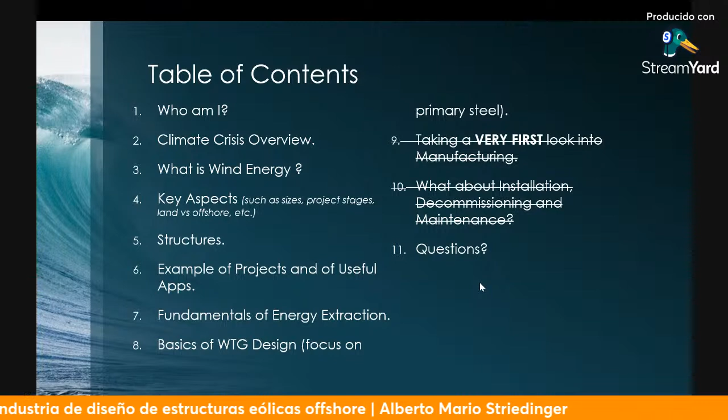And later on, the fundamentals of the energy extraction, so only the fundamentals, a bit of the basics of the wind turbine design, focus on the primary steel, and afterwards, some questions if the audience may have any questions about this topic.

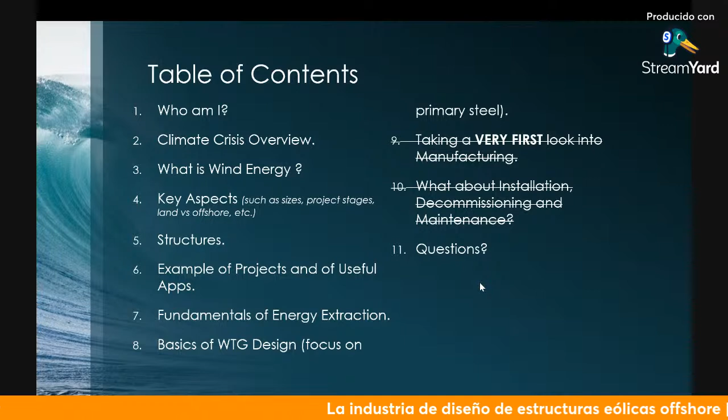And just before that, let me turn on my camera. Yes, that's better. I think you can see me now. Hello.

All right, so first a bit about me. So I'm a mechanical engineer, graduated from the Universidad del Norte in Barranquilla from 2005, 2010. Later on, I did 1 year in the United States for my bachelor as well. I ended up doing a master in renewable energy technologies, among those wind energy, which is the field I specialized in, and consecutively started working in the TU Eindhoven, that is in the Netherlands, with the University of TU Delft.

Later on, I went on working as a structural design engineer and the lead design engineer since 2014 at a company called Siemens Gamesa, until recently 2021, when I finished my work in the company. I also have my leisure time, of course, like any of you have hobbies. Mine is a bit of performing arts and looking a bit behind the cameras.

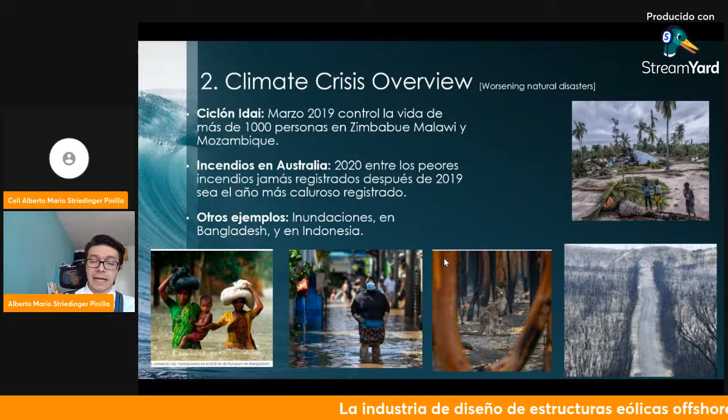So the climate crisis overview. Why is this important? Just to name a few aspects of what the world is going through. You have, for example, in 2019, there was a catastrophe happening in Zimbabwe and Mozambique. You have the extreme fire events that happened in Australia. 2019 was the record hottest year, especially in summer, obviously. And in 2020, you had the worst fires that the country could experience.

We also have floodings in Bangladesh, Indonesia, and obviously we have natural disasters also happening within our country, in Colombia. These are just a few pictures of what is happening around the world, and hopefully motivators for you to care and go into the renewable energy industry and solve the climate crisis or try to tackle it.

The news becomes harder once you realize that, according to the United Nations, the continent that's going to be most affected by this climate crisis is Latin America. So it's practically us. That's something to keep in mind, because country policies should be aligned in order to mitigate the effects this is going to have on everybody, especially in South America.

Why is this happening? Well, this is happening due to the greenhouse gas effect. If you go to the United States, they have this department called NOAA, for atmospheric and oceanic sciences. We can see that the CO2 emissions have increased rapidly. At the right hand, you have a plot from 2007 until 2019, or actually until now, which is a rapid increase.

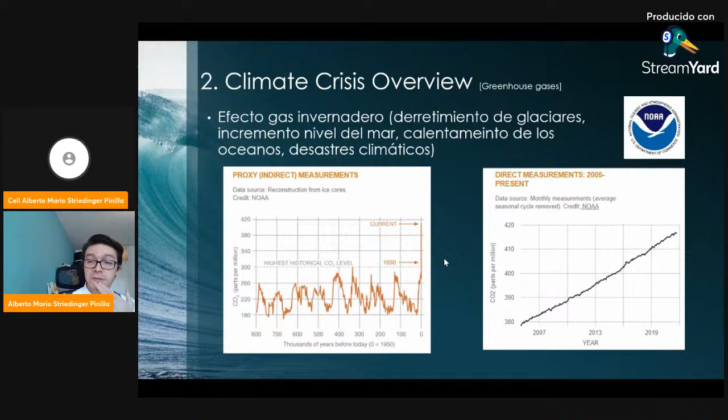But if you compare it to the left, which is what has happened around 800,000 years before, we see a cycle going up and down. It's only now, when human activity is more prominent, that we have an increase in these greenhouse gas emissions. Now, why is this important? What does it have to do with me, with us, with the climate?

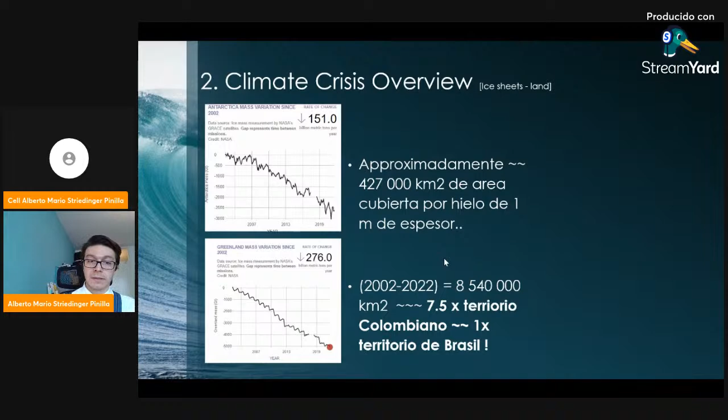Well, one example of this is the melting of the Antarctic and Greenland ice sheets, right? It's so drastic that, approximately, this is around 151 plus 276 billion metric tons per year. Just to try to glance at it, take this value from 2002 to 2022 and think of an ice sheet with a depth of 1 meter. That will cover around this much of an area,

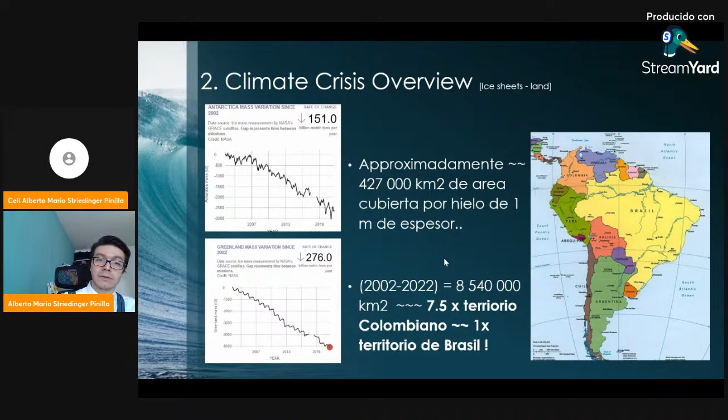427,000 square kilometers, which in this time frame between 2002 and 2022 is around 7 times the size of Colombia, or practically the size of Brazil. So this is a way to use data that you can find freely available and transform it into something practical. And this is just one aspect of the climate crisis, right?

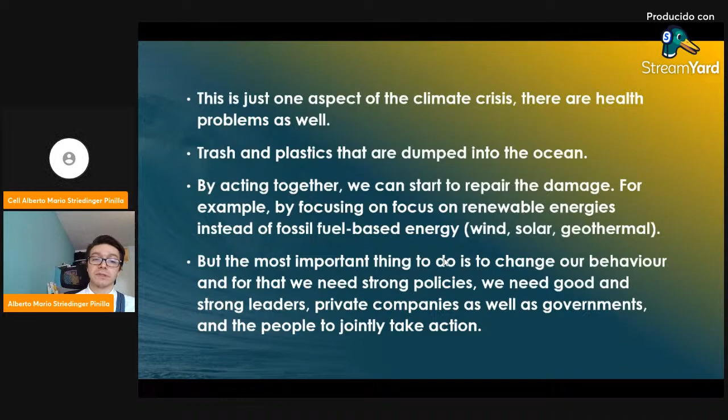There are also health problems related to it. There's trash and plastic that people and industries are dumping in the ocean. But by acting together, we can really repair this damage, for example, focusing not so much on fossil fuel-based energies, but more on renewables like wind, solar, geothermal, and so on. And something very important, besides the engineering aspects and technologies, is to actually change our behavior and come up with new strong policies. We need strong leaders, private companies, as well as governments to take action with the people.

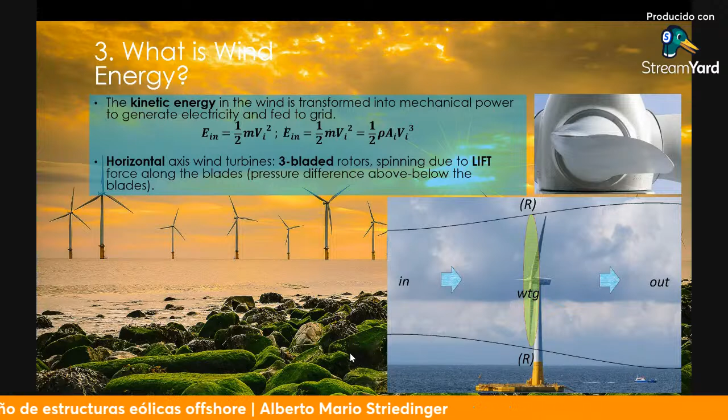So you have an inflow and an outflow, which is represented in the small diagram there in the right corner. And the rotor, you can consider it as just a flat plane where the energy is extracted. We're only going to talk about horizontal axis wind turbines with three blades, which are the most implemented. They are spinning due to the lift forces along the blades, and this is caused by the wind passing through.

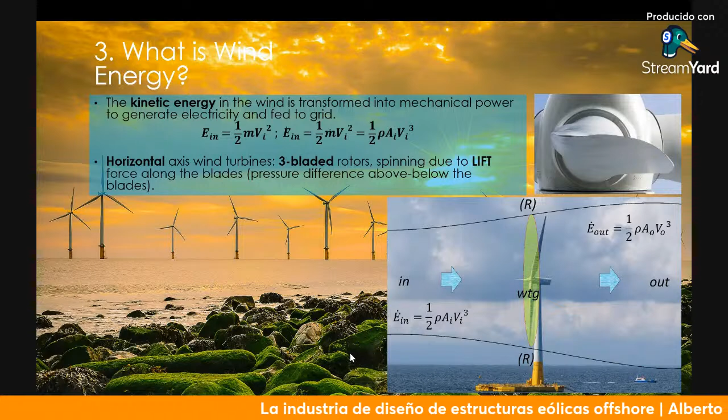The energy, as you remember from your fluid mechanics courses, the kinetic energy in a fluid is proportional to its density and to the cube of the wind speed, the velocity in this case.

But there is a maximum that you can achieve. If you take the energy balance into account, you have the energy flow going in and the energy flow going out. You take a ratio, practically the coefficient of performance, which is a way of measuring the efficiency of a turbine, the output generated, the power PR, divided by the energy incoming in the flow. With that value, you can estimate what your nominal power capacity would be.

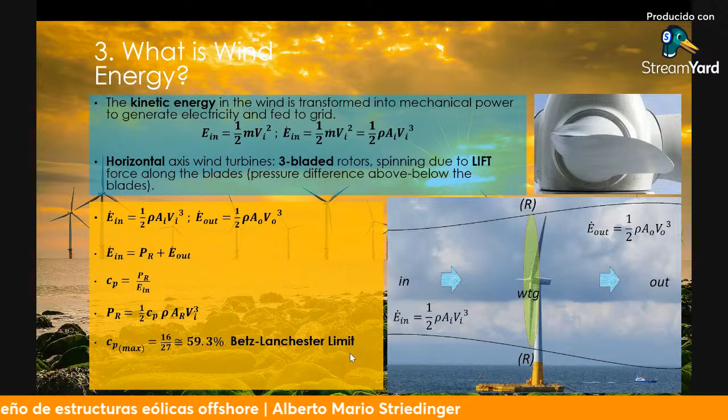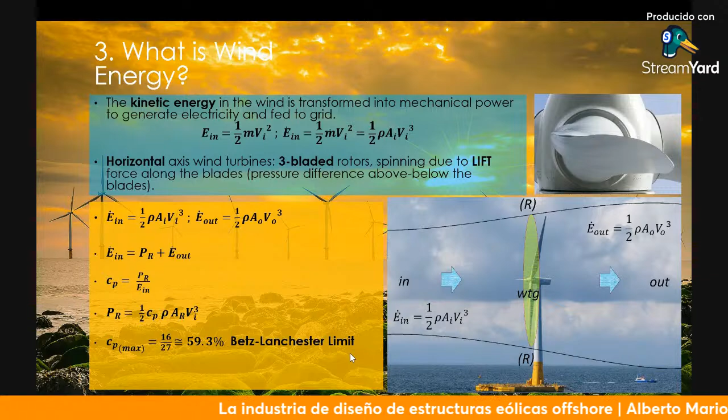There is a maximum to what you can get, and with this formulation, which is very basic, it considers a stream flow through the rotor. This work was done around 1915 to 1917. The maximum efficiency you can get, and therefore the one you're not going to achieve, is 59.3% efficiency in conversion. This does not take into account any losses, nor the rotor itself at this moment. So it's a top, a maximum.

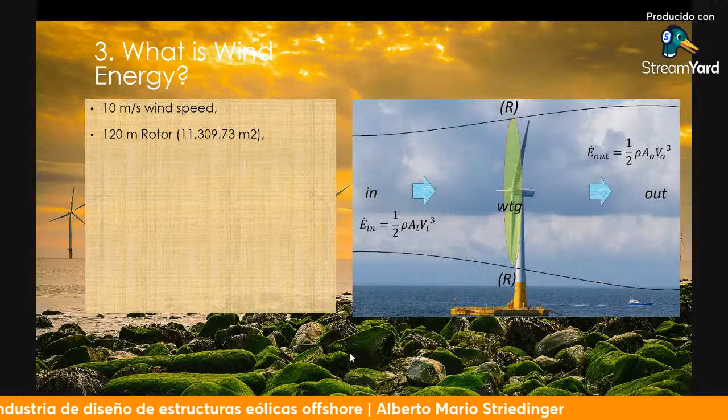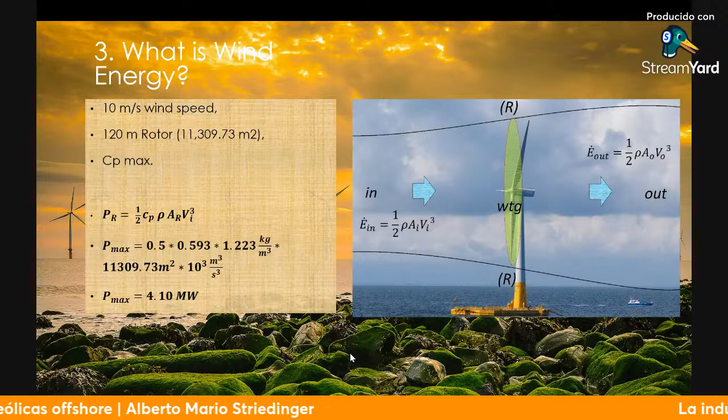To give an example of what this means: if you take the same formulation, say you have a 10 meters per second wind speed and a 120-meter rotor diameter, quite big, around a radius of 60 meters. If you have a maximum power coefficient, say 0.593 - not what a turbine will actually have, but the maximum you can get - then with these dimensions at this wind speed, the maximum is 4.10 megawatts. Any turbine about this size will never reach 4.10, but it's the maximum it aims to. That's the theoretical limit.

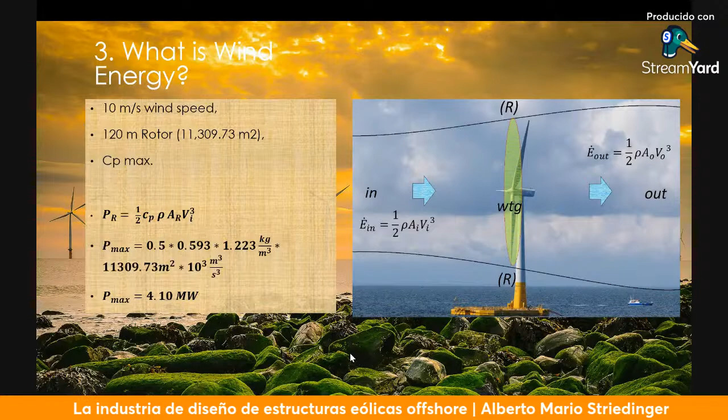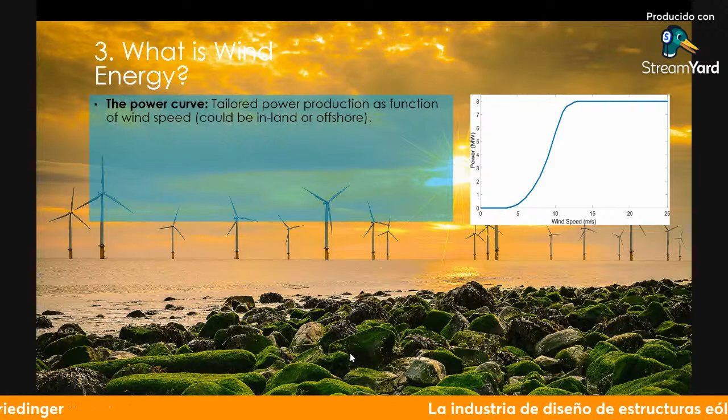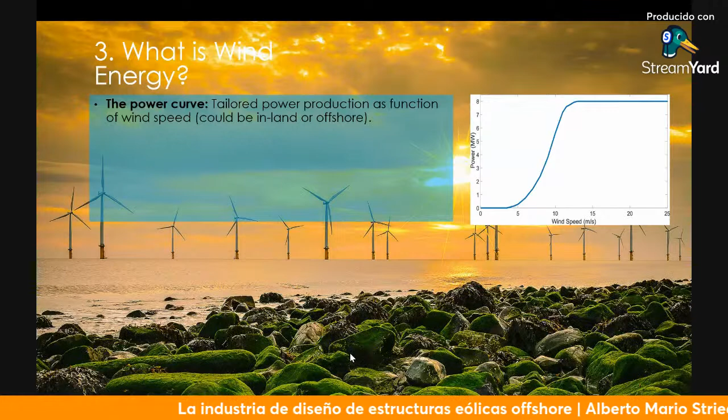Now, the power curve. In practice, the power coefficient varies with the wind speed, and therefore the power the turbine produces also varies with wind speed. These are tailored - it's very difficult nowadays to find one for a turbine because they're tailored for the site and for the client. This applies either for onshore, inland turbines, or for offshore wind turbines; both cases are applied in this manner.

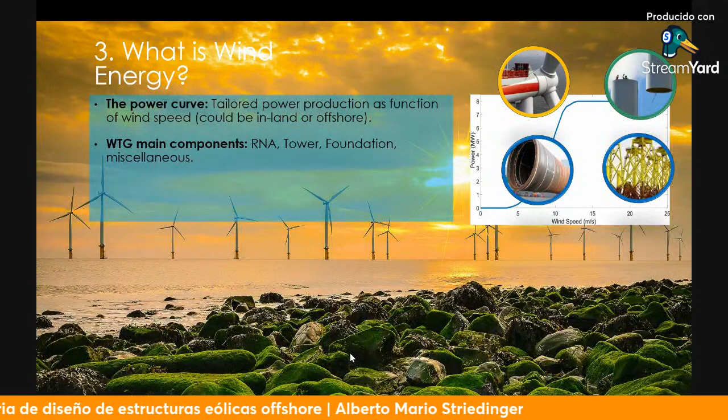Now, the main components we will discuss in this presentation are the RNA, short for rotor nacelle assembly, which is practically where you have the 3 blades and the hub, the nose in the middle. The nacelle assembly is where most of the electrical components, the gearbox, and other aspects are housed together - you can see it in the top corner in yellow. You have the foundation, and the tower to the right, which is installed offshore in a few sections - 2, 3, 4 sections. You have the foundations at the bottom, which could be a monopile, a big, very big cylinder, or you could have a jacket structure, which is a lattice structure.

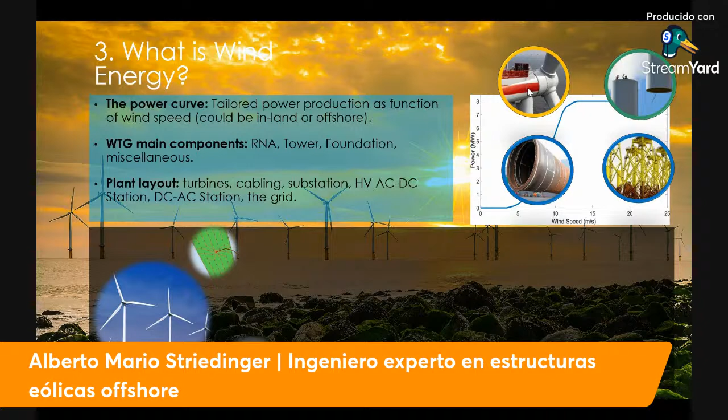The plant layout is very important to know about, because the wind farm is not only the wind turbines - to consider that would be a bit naive, not so realistic. So what do you have? You have the wind turbines in the farm, and the cabling that helps make connections within the turbines. These cables then go either to a substation or directly to a high voltage converting station, from AC to DC, because it needs to be transported to land.

In this case, I included 2 pictures of 2 projects. One is the Seamade project, one of the largest offshore wind energy projects in Belgium. The other one is unmanned, I think it's in the UK. It's also an HVAC/DC station, a converter station.

Then of course you have the connection going to land, and in the land - hopefully you can see the picture - you can see the relative size of the cable housing, because there are many cables going through it compared to the worker. Those are the cables we're discussing. Then later on you have the transforming station, where you go from DC to AC again, and it's fed back to the grid. So that's what we mean by grid energy.

So to summarize, this covers horizontal axis wind turbines in the offshore setting.

Because the performance characteristics, power curve, and power coefficient curves for market wind turbines are not readily available, you can still make use of reference wind turbines, especially for this presentation. One such reference is from the National Renewable Energy Laboratory in the United States, in short NREL. I want to show you the importance of these plots.

The cut-in wind speed is the wind speed at which the turbine starts producing electricity. It's not the wind speed at which it starts rotating, because that's lower. It's the wind speed at which it starts producing electricity. Then it ramps up, so your power coefficient starts to change, getting slightly better.

You reach a point where you are producing your nominal output, in this case 15 megawatts. That's the nominal power of this reference turbine. At that point, you could try to go up, but the machine will not handle it, so you have to cut it, capping the maximum power you are performing.

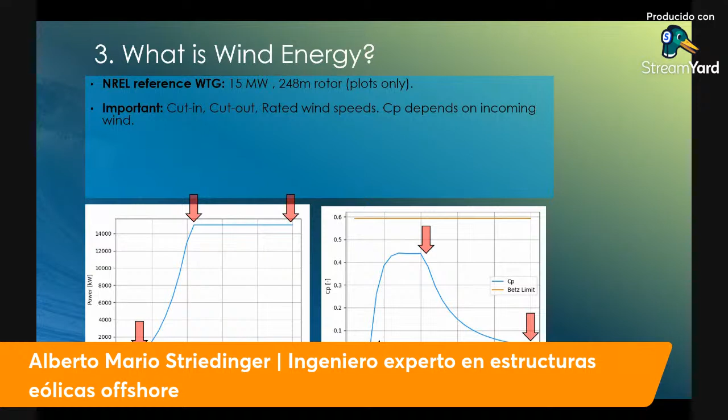To do that, the blades are pitched, rotating on their own axis, so your power coefficient starts to decrease until you get to the cutout wind speed. In this case it's around 25 meters per second. That means after that, you're not producing any power, it's cut out.

But once it starts to rotate, the relative wind speed, the wind velocity relative to the blade, starts changing. It's not horizontal anymore because it's rotating. So you need to incorporate the tangential velocity, which, if you remember from your dynamics courses, changes with respect to the radius. The rotational speed, the RPM, is not changing at a fixed RPM, but the tangential speed is.

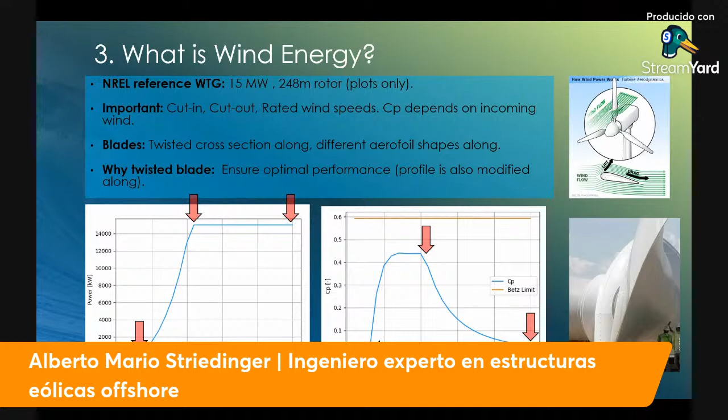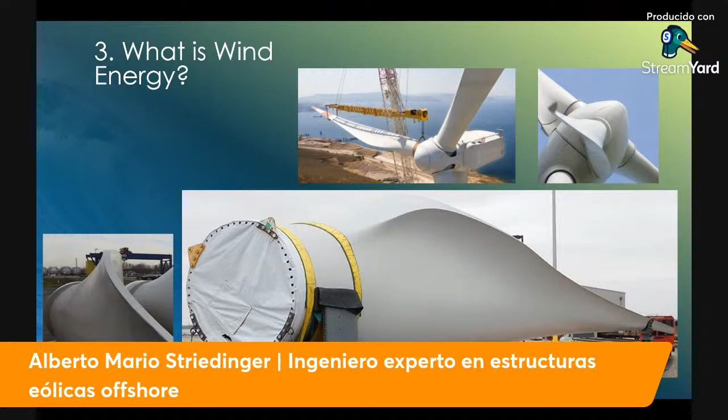Also in the transportation, you can see how this goes. So just to have a visual idea that indeed the blade cross section is being twisted and the airfoils are also changing, meaning the cross section area changes. Now I want to tell you about some key aspects.

A few things about the size of these machines - the ones the industry has been dealing with, and the ones to come, this year and next. Also the wind profile and load types, meaning the loads these machines must sustain to perform during their lifetime, roughly 20 to 25 years. The worldwide distribution of energy, so which countries and continents are the leaders. The project stages for investment, starting from zero practically until decommissioning, and a little bit about plant economics, the core basics only.

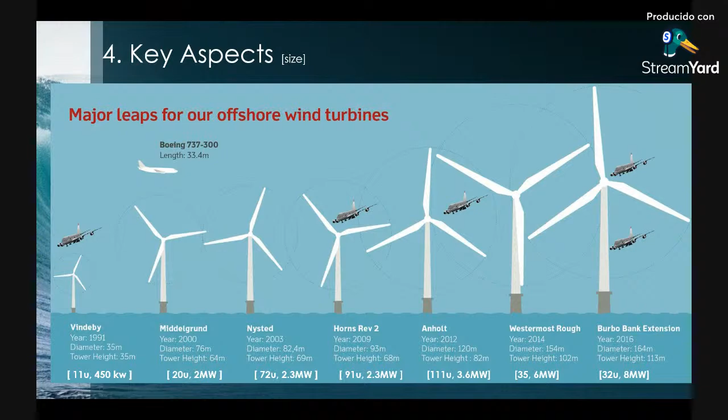As for key players, I'm not mentioning all of them, but you have Siemens Gamesa Renewable Energy, SGRE, as a turbine manufacturer. You have General Electric as well, making a turbine called the Haliade-X. You have Vestas and MHI Vestas producing this type of machine too. Normal wind turbines, as mentioned, have around 160 meter diameter, 120, 140, and so on.

But what about the mass of this structure, taking into account the tower and the rotor nacelle assembly? You can easily go from, let's say, 600-700 up to 1000 tons. Why? Because the tower alone, the steel structure below the rotor, can weigh as much as 400 to 600 tons of primary steel - just the wall thickness, the flanges, the bolts, mainly the shells, the whole structure.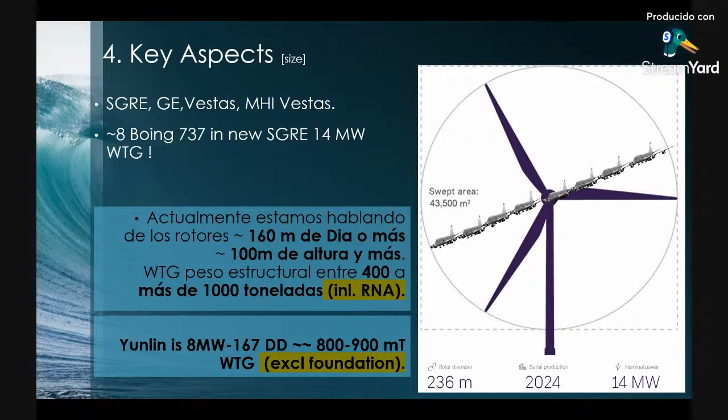Take for example this project I was fortunate to work on with Siemens, called Yunlin, in Taiwan. It has 80 turbines of 8 megawatts each, with a diameter of 167 meters. The weight of this structure, without the foundation, is around 800 to 900 metric tons. So we're not talking about something you can lift very easily.

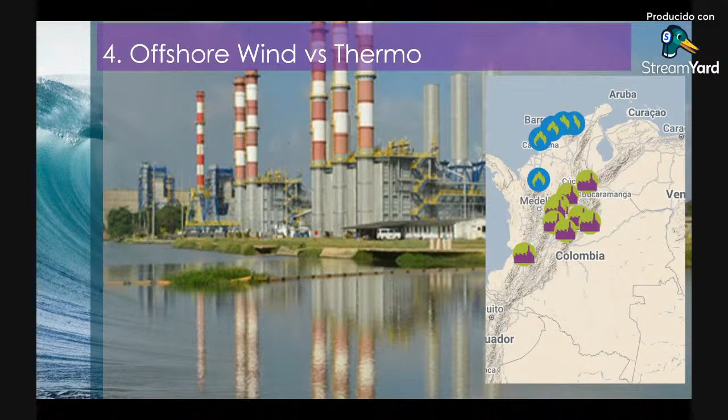Now how does this compare, with these capacities, to thermal plants? I decided to look at the ones in Colombia - by no means all of them, but what I could find. I put the map on the right, from this website, Concentra. If I'm not mistaken, around 30% of the energy capacity in Colombia, which is 18 gigawatts, is thermal power. We have Termo Barranquilla, Termo Cartagena, Termo La Guajira - 290 megawatts, 180 megawatts - and Termo Barranquilla has 3 plants, so around 900-ish megawatts total.

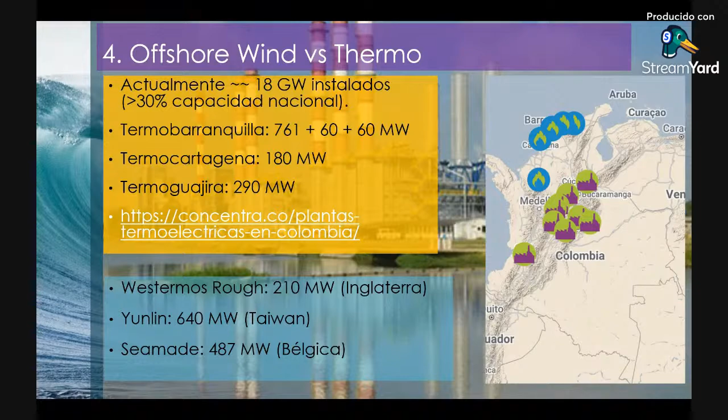This is gigantic, right? But wind energy is also reaching those values and more. Yunlin on its own has 640 megawatts - a gigantic wind farm. Another one, Westernmost Rough, located in England, an older project, is 210 megawatts - almost the size of Termo Guajira, not the same but close, and bigger than Termo Cartagena in nominal capacity. You have Seamade, the largest offshore wind farm in Belgium, around 487 megawatts, which beats immediately Termo Cartagena and Termo Guajira.

Now, one of the key aspects: how does the wind come to be? We're using wind, right? So it's a little bit important to know at least some basics of this. I'm going to go a bit fast. So the Earth is heated up by the sun, mostly in the equator areas, because of its orientation and because it's rotating on its axis, etc.

So the heat flows from the hot zones to the cold zones, and this is one of the main drivers for what we call the global air circulation. I'm not going to say your prevailing winds, because that's a term in atmospheric sciences, but you could sort of think of that. And if you add the effect that the Earth is rotating on its own, then you have all the flow patterns you can imagine.

In order not to go so complex, what we care about for the implementation and the energy extraction of the wind turbines is what we call the planetary boundary layer. If you go back to your fluid mechanics course, remember a flow going on top of a plate: you have a no-slip condition just close to the plate, so the wind speed there is 0, and it slowly increases until it reaches a value that you could consider almost constant. Something like this happens as well within the atmosphere.

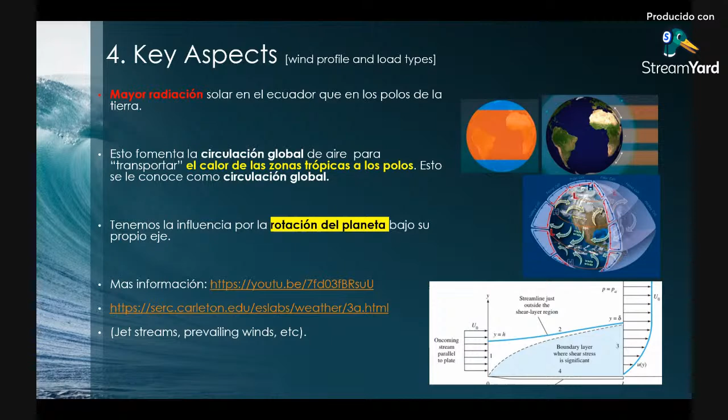And that area where you have your boundary layer, your wind speed profile, is called the planetary boundary layer. It has a height of approximately between 1 and 2 kilometers. That's where the turbines are, that's the wind speed profile that you care about. But how on earth do you get this? At some point you need to have measurements.

Now, the geostrophic wind is the wind just above the planetary boundary layer, which, if I'm not mistaken, has a constant wind speed and is just dominating over there. But between that wind speed and the soil or the sea, you have the wind speed profile. What is a wind speed profile? You have measurements that tell you the wind fluctuations, meaning the turbulent part of the wind speed, and you have the mean, the average part of the wind speed.

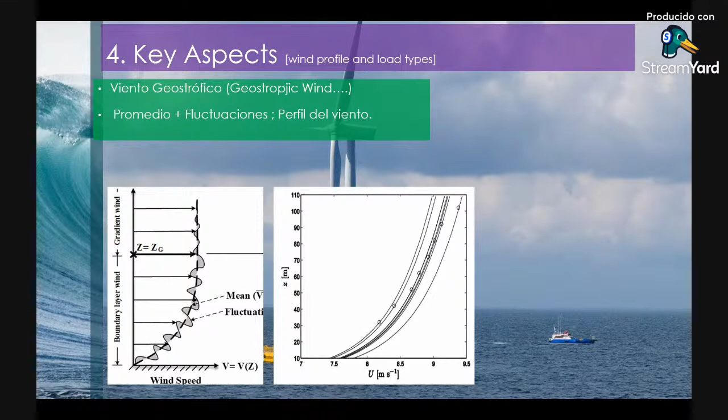And this one is implemented to have recordings of the wind speed along certain heights, and that's how you measure them. Then, of course, later on, these are plotted. What you see in the middle is a plot of the height in the vertical axis, and in the horizontal axis you have the wind speed. These are the profiles that you need for the power extraction, I mean, to make an assessment.

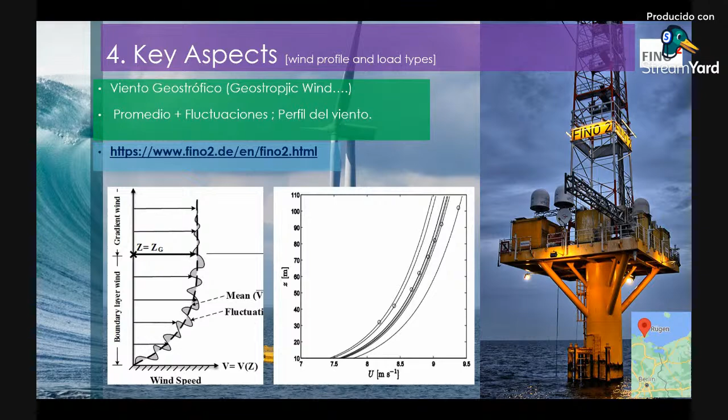One example. It's not exactly the same met mast, but I want to emphasize the difference between wind speeds on land and wind speeds at sea. In this case, we have actual measurements from a report from the Energy Research Center of the Netherlands, which is ECN, and TNO. These are both institutions within the Netherlands.

To the right, you see a geographical representation of where all the offshore points were for the measurements of the wind speeds, and there's one little point inland where you have your reference inland wind. To the left, we have a plot from one of these reports showing, in light blue, the wind speed profile up to a height of 600 meters, so more than half a kilometer, of how the wind speed profile is on land.

And all the other colorful ones, we don't need to go into which one is what, but these are all offshore. Immediately you can see at 10 meters, which is the first value you see in the vertical axis, you have a wind speed of 4 meters per second on land, and between 8 and 9 meters per second offshore.

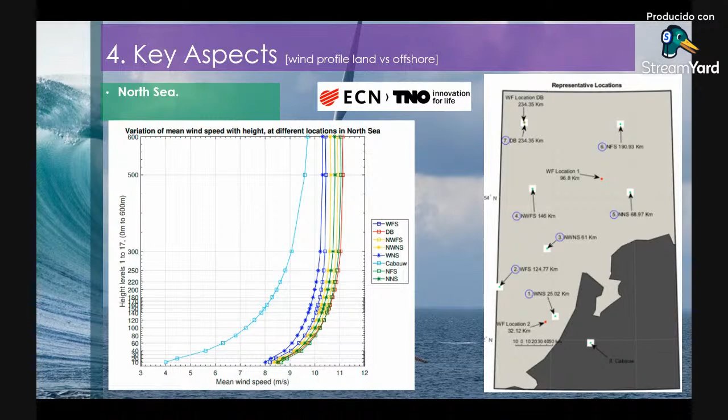Right? And it increases and it reaches a constant value at around 250, 300 meters height. What does this mean in a practical sense? Well, let's take the case for a hub height, a height where you're going to extract energy, of 100 meters, with a 120 meter rotor and a 220 meter rotor. If you have an average power coefficient of 0.45, which, by the way, is not so far-fetched. Most wind turbines should have a maximum power coefficient around this.

That means that at this height, you can pick and choose any of the wind profiles you have there. But if you just take a random one, you can take one at 10 meters per second wind speed at this height, which should probably be one of the green-yellow ones. But inland, you have a wind speed of 7.2 meters per second. There's a difference of what, 28%? It's a lot, but let's see how much difference you get in power. Using the formula, the power coefficient, the density, the area, and the wind speed to the power of three. The difference is dramatic.

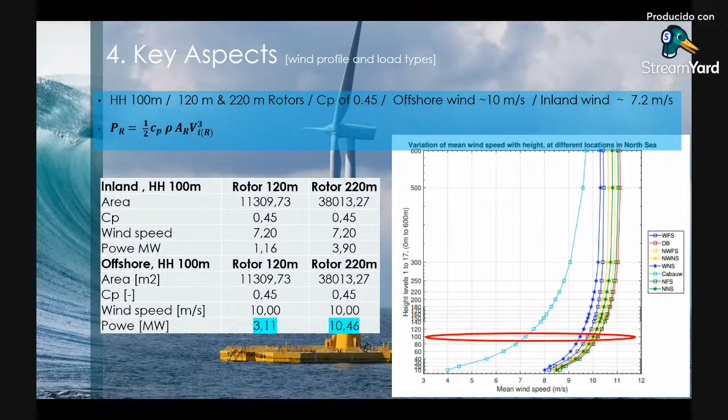However, we can. Oh, my phone is done. Just because this is how I talk to you guys. By the way, is everything clear so far? Can you guys understand my English properly? What we've been discussing, the introduction. Okay, and then I will continue.

Let me know. Okay, one of the key aspects, its advantages, because we already see we have more potential for energy. The wind speed is higher over there at the same height, right? The noise and vibrations, at least for the public, because with wind turbines inland, you have noise and vibrations that are close to the population, etc. So people do complain about that. And installation in the ocean, even though it's more expensive, you can build bigger and wider wind farms than inland. You don't have to use that much land to have this.

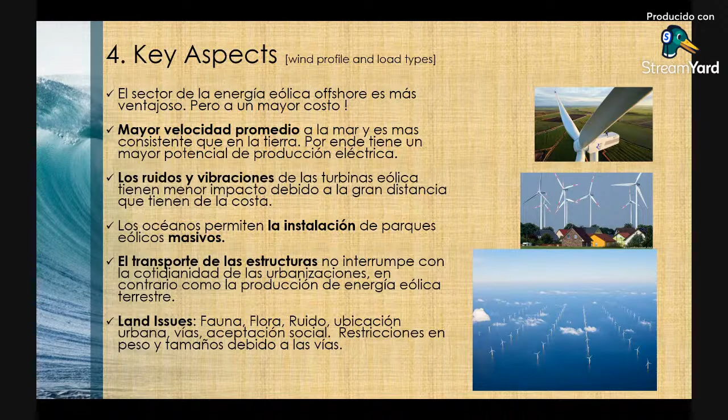Now, the wind speed profile and the load types, especially, I'm going to focus now on offshore. There are three major sources of your loads. Mainly the wind, as it interacts with the rotor and it gets transported. Then all those loads get, so to speak.

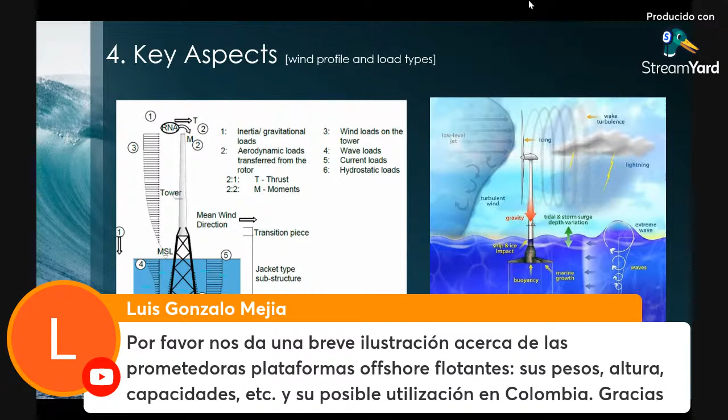Okay, yes, I'm seeing a question about floating structures, their capacities, and possible utilization and implementation in Colombia, right? Okay, they are actually coming new. There's a project, well, it's not new already, Hywind Scotland and Hywind Tampen. These are located in the UK. Let's see if I can show right away. Yeah, I think I can show right away. Just to jump to that one. Yeah, here. Okay, this is not the one I'm talking about.

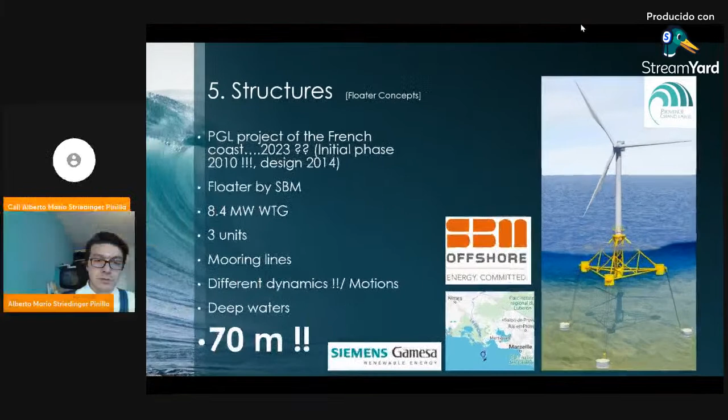This is in France. This is called Provence Grand Large, PGL. It is a floater design concept, and mostly you use this when the water depth is just too high. It's too deep. In this case, the water depths are 70 meters, right? So if you would produce a jacket or another kind of fixed foundation, the costs are just too expensive for the transportation, the installation, the production, and the design itself. Now, the size of the turbine itself most likely is not going to be too different from the fixed offshore wind turbine. What is changing, though, obviously, is the floater. So the floater, well, the idea is that it floats, right?

So there's a ratio between its weight, and you see, for example, here some containers there that help to make this unit float. But this wind farm, just to give an example, each turbine is 8.4 megawatts. It's not yet installed though.

It's not yet installed. It's a French project that should regain its momentum this year or next year for the final stages of starting the construction and installation. Not so sure about that one. It's 3 units, so it's a test. And the difficult aspect of this is that the dynamics are different. It's not fixed, so in this case you use tensile lines, or not cables, but you can call it chains, so to speak, to hold this thing together.

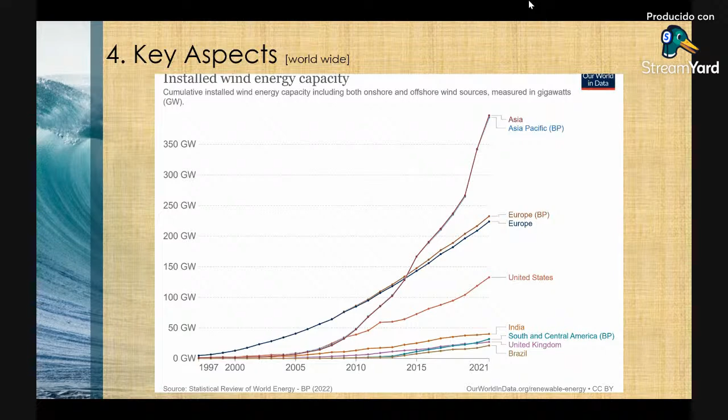You can see that after around 2015, Asia started taking the lead. And when we discussed the aspects of the project, technology, engineering, is not the only aspect of it; there are many.

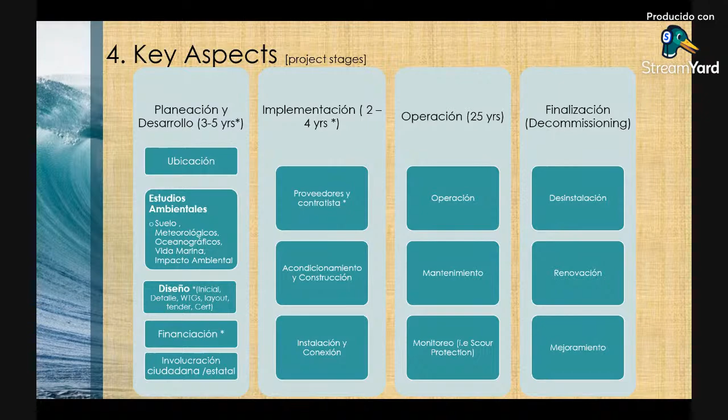Just installation and the connection could last 1 to 2 years, right? If you are very fast, just the installation aspect on its own, depending on the size of the wind farm. But I think I've read a few that you can do it in 1 year or 6-7 months. But of course, this is an isolated aspect of the implementation phase.

Now, a way to take a look at the cost of a wind farm in a very simplified manner is the levelized cost of energy, right? Because otherwise, for a business case, you have a cash flow, you have your investment, you have a lot of things that need to be bought. So the LCOE is very useful here, and also to compare with other technologies. So it's a summation of the capital expenditure, the operations, and the decommissioning.

It literally means what is the minimum income that the project needs to have with respect to the megawatt hour or energy produced, taking all the costs into account along its lifetime. So it is proportional to the big investments you do, the operations, the maintenance, and the service cost, and the net energy that you are going to generate, and the interest rates, and the lifetime of the project.

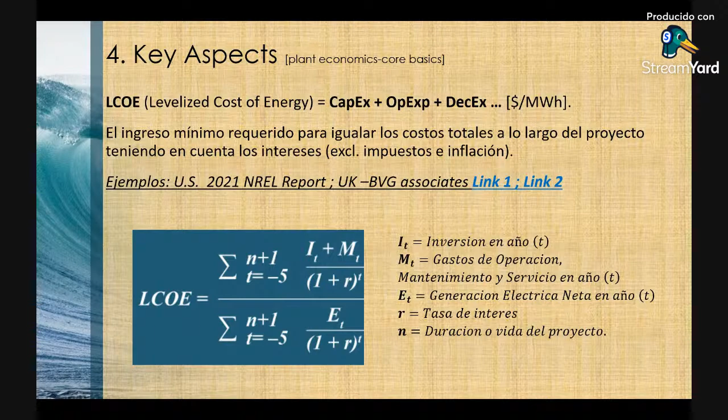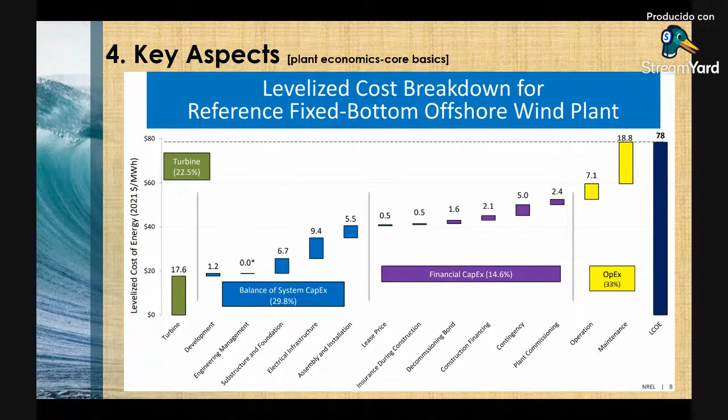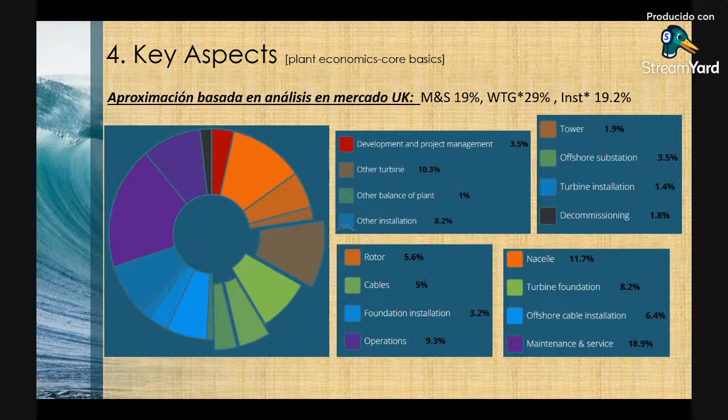This is another example, for the UK. By the way, the links are here, so you can check them later on. But in this case, an important thing to highlight is that the maintenance and service, the wind turbine on its own, and activities around a wind turbine and installation are just the biggest thing. That's the whole aspect.

Now, how do you use this? Because we mentioned that this is very good to compare with other technologies. There are a few links here, one from a Bloomberg analysis in 2018, which is not up to date. Later on, I'll show you a new one from the Fraunhofer Institute in Germany. But let's take the data from 2018. The LCOE for wind energy, wait, I put dollars, but I think this is actually euros. I made a mistake here. Anyway, in the plot you can see the offshore wind and the onshore wind.

The onshore wind is between 58 to 76 US dollars per megawatt hour, and the offshore is from 99 to 175. If you compare that to onshore wind plus battery, biomass, nuclear, pumped hydro, non-tracking photovoltaics with a battery system, and other aspects, you can immediately see, forgetting about all the complexities of the other systems, from a financial perspective, that wind is already ahead, because the cost overall during the lifetime is relatively low.

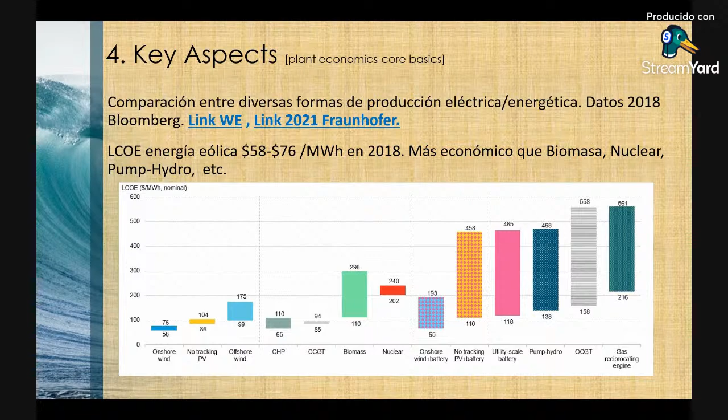At least the margin is relatively low, much lower than the other alternatives that you see there, like biomass, for example. It's not that I'm against biomass, but it's just to give an example of another renewable energy source. It's a range, right? So it does not speak of every wind farm project, or every biomass project, and so on. It's just an average.

There is a practical book called Operational Guide by Jochem Tacx about installation and so on, but I found it very useful for an understanding of a few costs. And I'm going to say it's an approximation, because getting the actual cost of investment, not just per megawatt hour, is a bit difficult.

Companies are, it's not that they are jealous of that, but it's highly classified information, at least that aspect. For every 100 megawatt capacity, it's apparently 17 million US dollars, which is a lot of money, right? And the engineering is around $480,000.

For the wind turbine, I put a few asterisks, because it's not just buying the wind turbine, it's about all the related activities that the wind turbine contractor is obliged to provide once he provides a turbine. It doesn't work like that. So there's assembly guidance, assembly operations, assistance in operations that the wind turbine manufacturer has to be involved in during installation, commissioning, and decommissioning. So for big ones, it's apparently around 14 million US dollars per 10 megawatt of a wind farm.

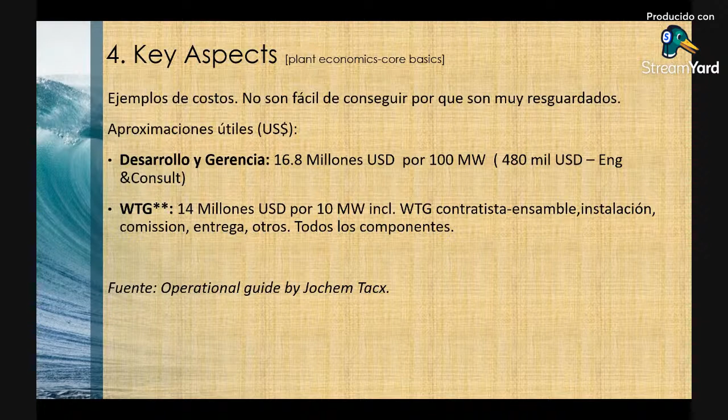Now this one I'm not going to go through because it's a lot, but I made a table a few years ago which I think should be useful for you guys about some actors that are active, some companies active within the wind energy industry. I've divided it by the WTG, the wind turbine generators or contractors, and their websites.

I work, for example, with Siemens Gamesa for all these years, but we have competitors like Vestas, MHI Vestas, General Electric - these three players are coming with wind turbines around 14 megawatts, 12 megawatts, the very big turbines. And you have other participants like Enercon, Nordex, Senvion used to lead a long time ago, but...

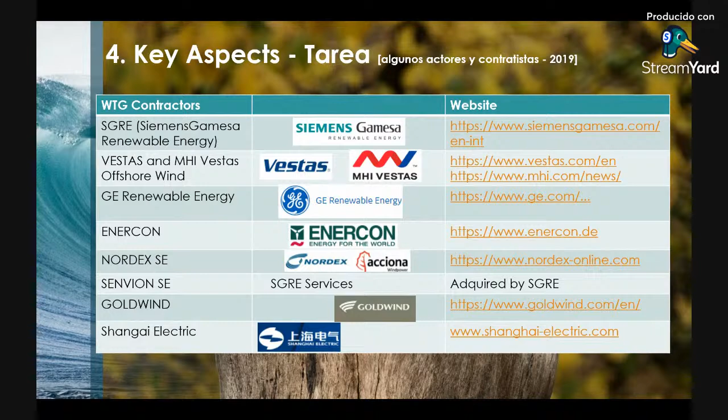I think it was acquired already by SGRE. It's no longer existing, as far as I know. You have Goldwind and Shanghai Electric in China, and plenty more.

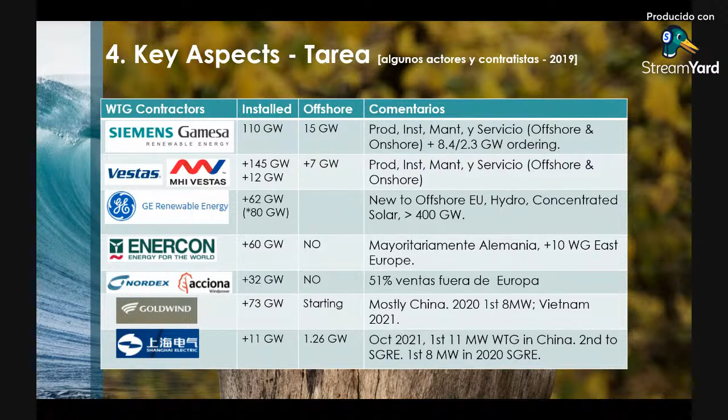So this is for the installed capacity, the offshore, and some comments. I'm not going to go into detail because this is for you to read later on.

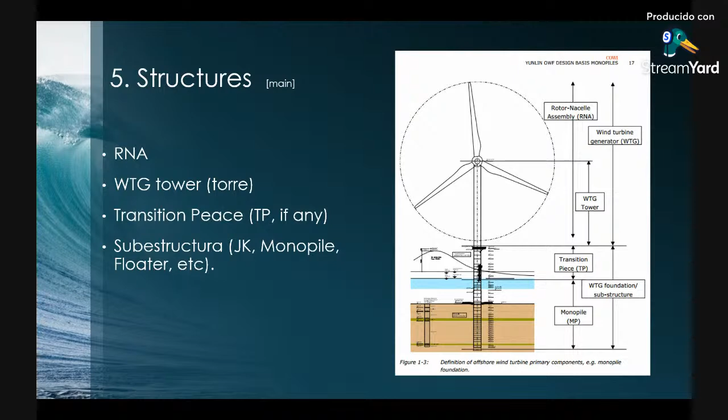Okay, I'll continue. So for the structures, I'm going to show you a few pictures. You have the rotor nacelle assembly, the tower, and the transition piece, which is what connects the substructure with the turbine. And the substructure could be a jacket, a monopile, or a floater.

The monopile used to be thought that it would only be good for maximum 30 meter water depth. But there are projects challenging this. For the project Provence Grand Large, PGL, at least for that floater device, 70 meters water depth, the project is going for floaters. You have a jacket, so floater is practically around 50, 60, 70 meters water depth.

You have tension leg platforms in which you have a floater device, and then the chains, or let's call them ropes, the catenary chains, are tensed immediately, all the time. There might be some changes here and there, but they are tensed all the time.

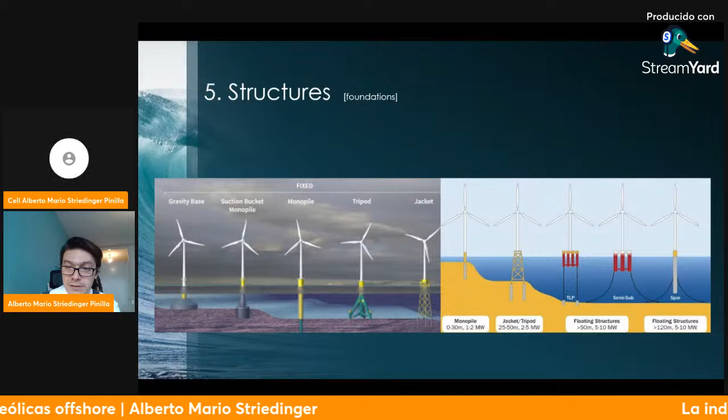That's one dynamic. You have the semi-submersible one, in which the chains are not tense right away, but because the chains are there, it restricts the motion in a sense, and it allows a certain motion. And then you have this spar, which is practically, to put it mildly, like a big monopile that can actually float.

How big are these monopiles, for example? This is for a project called Gemini.

Wait, something happened.

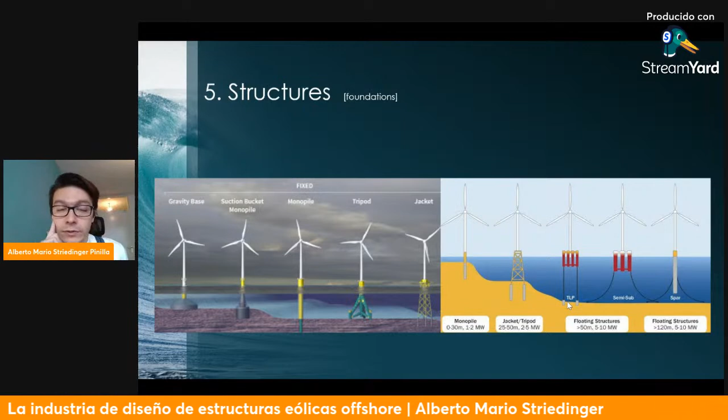Okay, so for the structures, you have the fixed ones to the left, and the fixed and also the floated ones to the right. For the left one, you have gravity base, suction buckets, monopiles, tripods, jackets, etc. But the one that by far dominates the market in the offshore is the monopile. It by far dominates it.

It's one of the simplest solutions to design and manufacture, and one of the most proven technologies, so companies and investors mostly want to go with it. It used to be thought that you could only reach a maximum water depth of 30 meters, but I've seen that being challenged already. These numbers don't mean the monopile can only be implemented up to 30 meters. But for deeper waters, like what we saw for the PGO case, with 70-meter water depths, you do have to use a floater.

There are three types of floaters, more or less: a tension leg platform, a semi-submersible, and a spar. The spar is most likely just to put it, very informally speaking. It's like a big monopile that can float, and you have control by the catenary lines anchored to the seabed, so it does have a lot of motion.

Also the semi-submersible, in this case the floater design is different. It's submerged a little bit, and some part is not submerged. Then the catenaries, so the chains are not tensed, but in the tension leg platform they are. These all have different dynamics, and by having different dynamics, the design is completely different, and the structural loads and how you design them are different.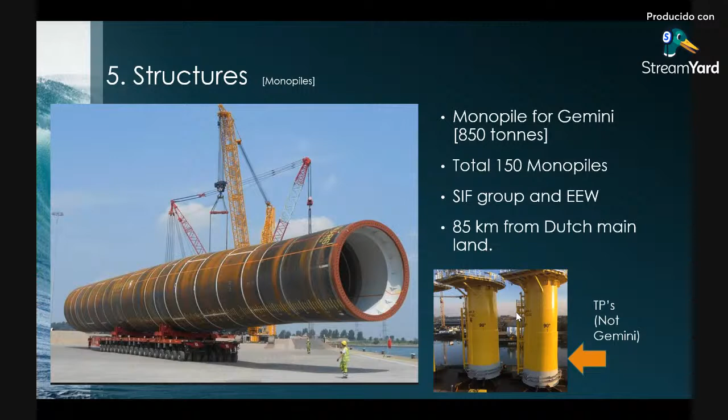The transition piece—why is it important? There are some designs that don't require it, but most of it is grouted to the monopile, because the monopile is hammered during installation. So if it's hammered during installation, you can really damage the interface there.

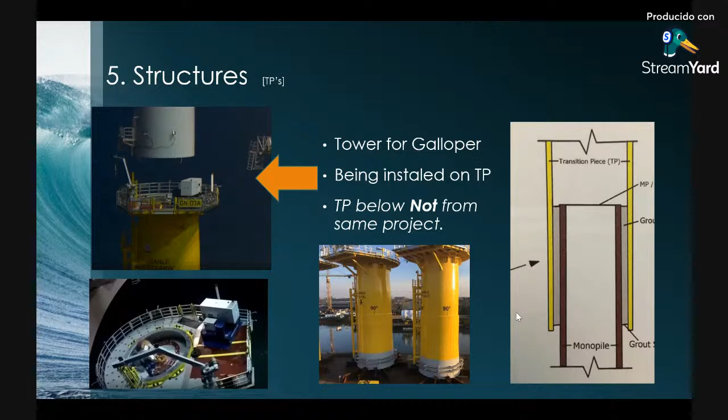In the transition piece that you see to the left, it's been installed with the tower on top. You have a platform, and what is called a davit crane, just a crane to assist the personnel there. That whole platform is implemented for installation and for managing devices and access inside the turbine. The boat landing platform is also attached—you don't see it very well here, but it's attached to the TP structure, the transition piece.

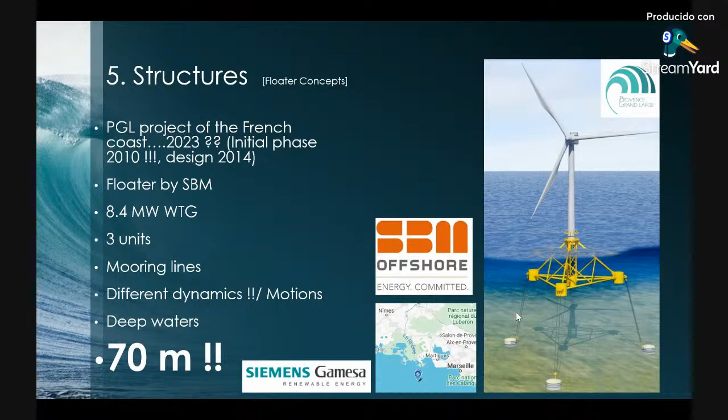The floaters—well, this one I briefly discussed already. It's in France, from 2014. This is just a picture to show exactly what kind of structures need to be analyzed when we are talking about floating structures.

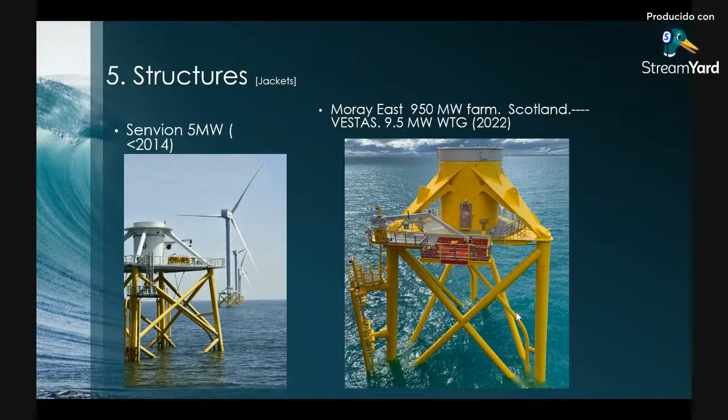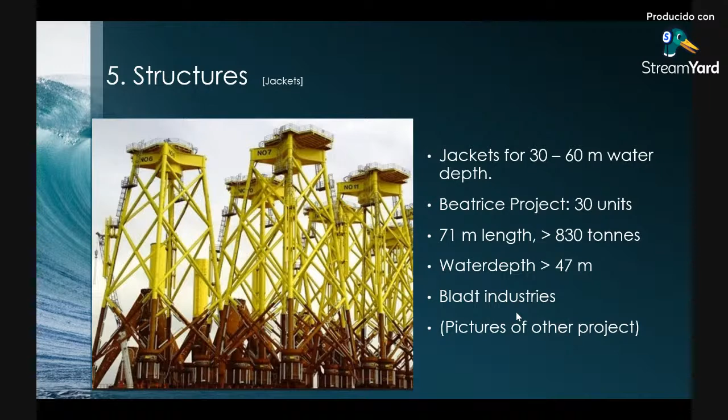An example, not a picture of that project, but for a project called Beatrice, you could have 30 units. The water depth ranges from 30 to 60 meters, if I'm not mistaken, for jackets for its implementation. This project had a massive weight due to some different aspects and issues, and they needed to design against this. I think this project never ran because the structure was not good enough, and also some other aspects of the business case.

But when you have innovative solutions, sometimes they do fail. They become difficult to assess in the sense that there's no standard approach to it. There are some standard aspects to it, but there's always a risk, and some of them need quite a bit more research.

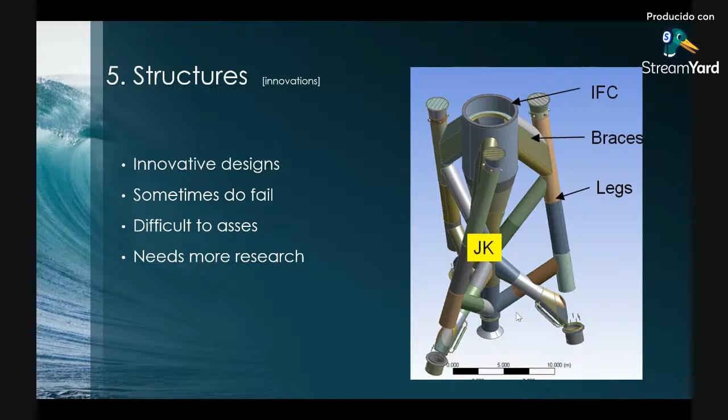Now, practical aspects, guys. There are actually a few wind farms that have mobile apps you can download right now. They are free, and you can check the power production, check the wind speed, and see how this wind farm is performing. So it's information you could use for a class, or for analysis, to check your knowledge, etc.

One of these, well, there are two actually: the Gemini wind farm, the one we discussed already with 150 units, and another Dutch one called Friesland. These are just snapshots where you can see immediately the gigawatt hours of energy being produced. You can follow that on your own, it's free. I have a short video there of Friesland wind farm, but I don't think I'm going to show it right now. I think I may have used too much time. Apologies for that, we're about to finish.

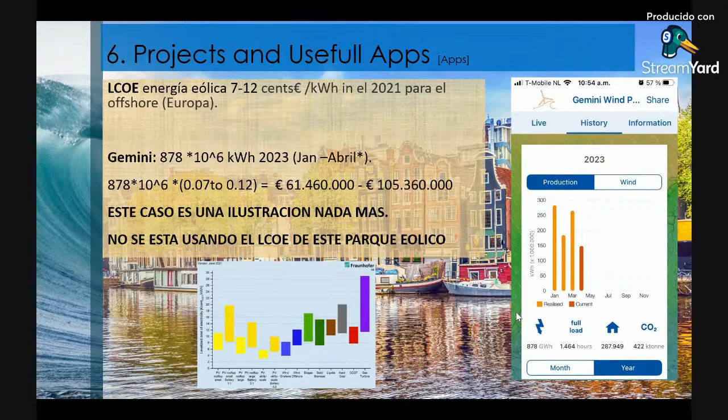Now, how useful are these apps? I'm just taking an example, and the following is only an approximation, it does not pertain to any specific performance of this wind farm, but it should give you a hindsight and an idea of some costs. Let's use the LCOE. This is not the LCOE of the wind farm itself, of Gemini, but rather from a source, the Fraunhofer Institute in Germany, from 2021, in which they are comparing different sources, just like the one we saw about Bloomberg in 2018.

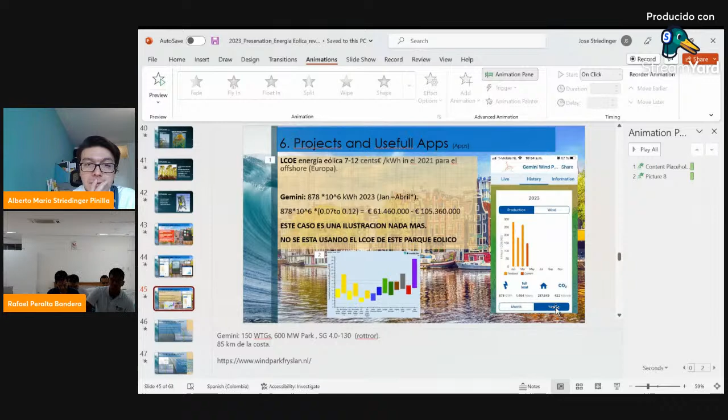Talking a little about the layout of the turbines, what strategies from material engineering have been proposed to mitigate the damage caused by corrosion in the turbines and their infrastructure, since it is known that the sea is a highly hostile area in this matter?

Yeah, okay, good. Yes, the main corrosion protection that you get is the coating. So especially for the foundation, either the monopile, the jacket, or the floating foundation, there is always a coating. It's not a paint though, but a layer implemented on top of the foundation to prevent it from oxidizing. Also from a design perspective, that depends on the standards and which company is designing; a certain level of degradation needs to be taken into account for the design during the lifetime. But the main defense is the coating, for sure. It's not per se on the material, to be honest, not like you add something to make it water oxidation resistant, but there's a coating added on all the foundations. There's also a bit of coating in the tower itself, but in the foundations the requirements are stricter because obviously you are in the sea. Does that answer your question?